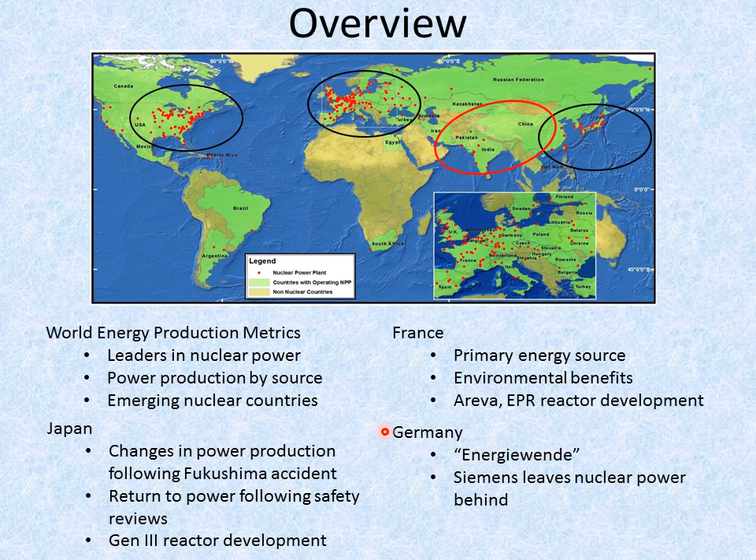We'll take a look at world energy production metrics and emerging nuclear countries. We'll move on to Japan and the status of their nuclear industry following the Fukushima accident. We'll look at France as a model country for nuclear power, and we'll move on to Germany's energy transition. We'll look at how Russia, China, and South Korea are expanding their nuclear capacities as well as those of other countries.

And we'll take a look at why India's nuclear fleet has largely been constructed by other countries, as well as the beginning of their own domestic production. Lastly, we'll look at the repositories being built in Finland and Sweden.

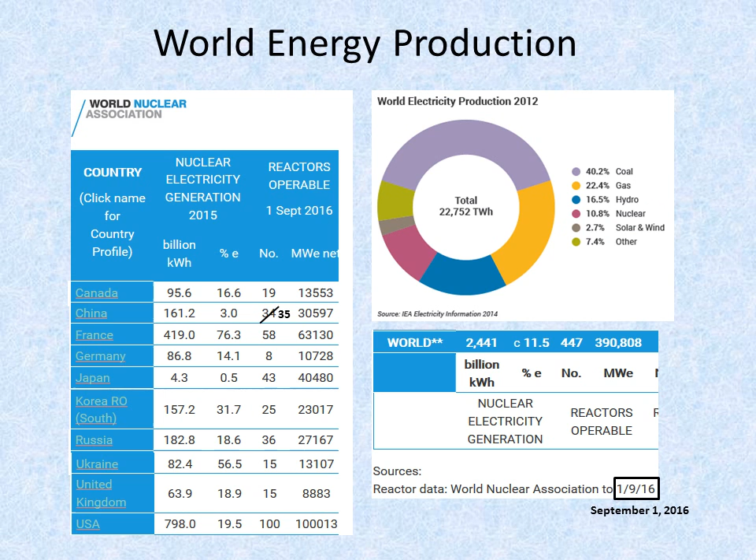We see here a comparison of the operating capacity of the world's nuclear leaders. We see the United States has the most reactors with 100, and France in second with 58. And 447 reactors operating worldwide generate roughly 11% of the global electricity supply.

We have some other graphical representations of the leading nuclear capacities worldwide. In addition to the operating reactors, there are 59 under construction, 168 planned, and 345 proposed.

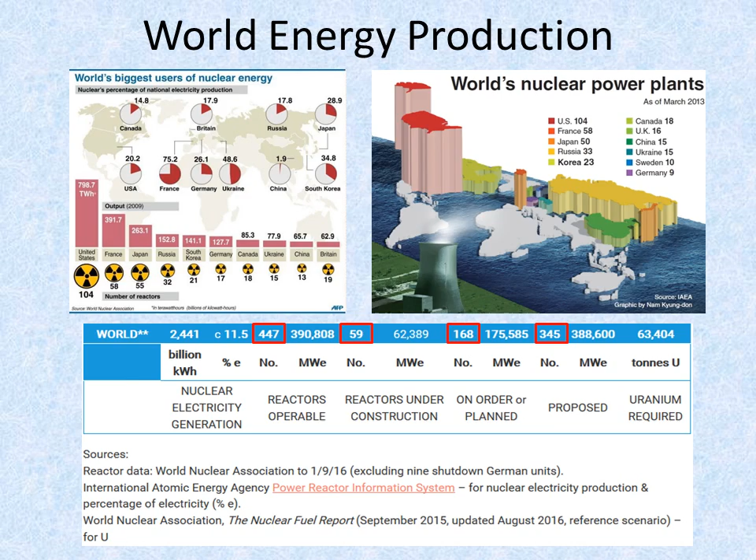While this presentation focuses primarily on the generating powerhouses of the world, it's important to note that there are several smaller countries looking to either develop or expand their own nuclear power programs. Despite this, the largest contributions to the global generating capacity will continue to come from countries who have already well established their nuclear sectors.

Japan is the first nation we'll take a closer look at. For each country, we'll see the number of reactors operable, under construction, planned, and proposed at the top of the page. As a result of the Fukushima accident, Japan's nuclear generating capability has largely been diminished, as the majority of their reactor fleet was forced to shut down after the tsunami.

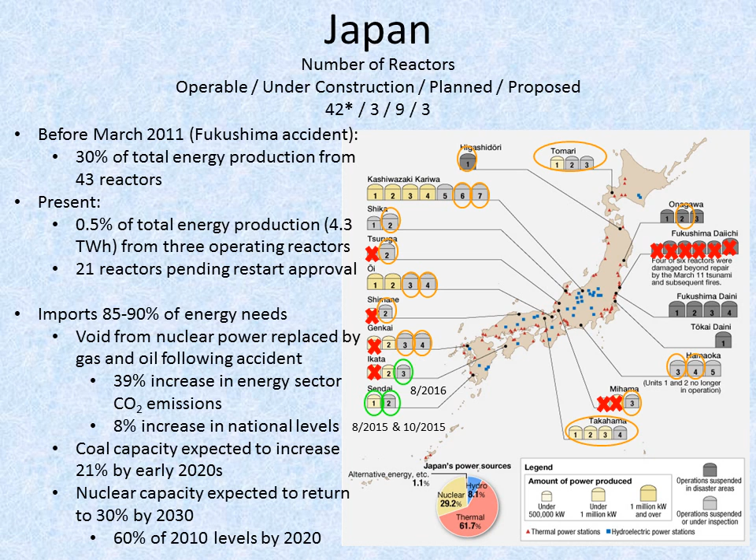Where Japan once generated one-third of its total energy production from nuclear power, today just 3 operable plants generate a fraction of that number. The rest of the fleet is awaiting restart approval for reasons ranging from but not limited to safety inspections pending and under review, court injunctions, and engineering upgrades.

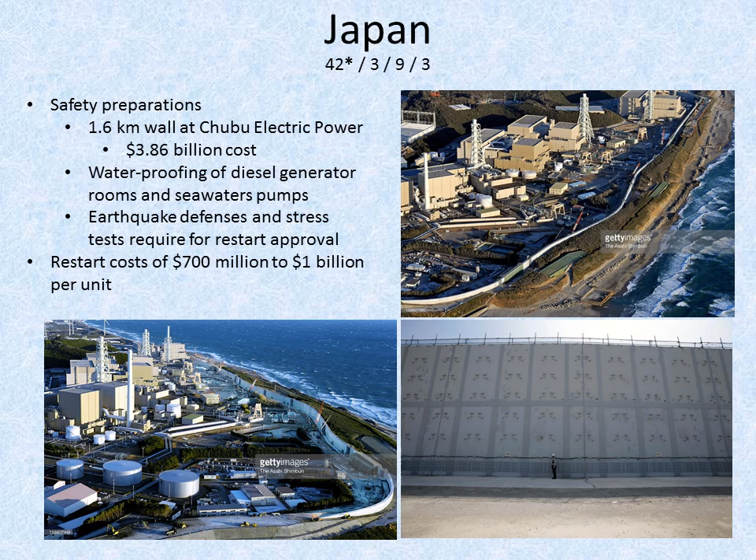We see some of the engineering upgrades taking place in the form of the tsunami wall, with a price tag of nearly $4 billion. Before returning to power, reactor sites must pass stress tests in which tsunamis, earthquakes, and loss of power scenarios are simulated using a reactor at full power with full used fuel ponds.

Prior to 2011, we see a push for self-sufficiency in the island nation of Japan, their work towards a closed fuel cycle, and the development of their fast breeder reactor technology. Despite the meltdowns at the Fukushima plant following the tsunami, Japan has continued development of their nuclear program.

Immediately following the accident, the controlling government party actually lost office after trying to make a move away from nuclear power. We see here construction of Japan's new Generation 3 and 3+ reactors, one of which has been proposed for the Comanche Peak site in Texas. Japan hopes to return to their pre-2011 nuclear capacity by the year 2030.

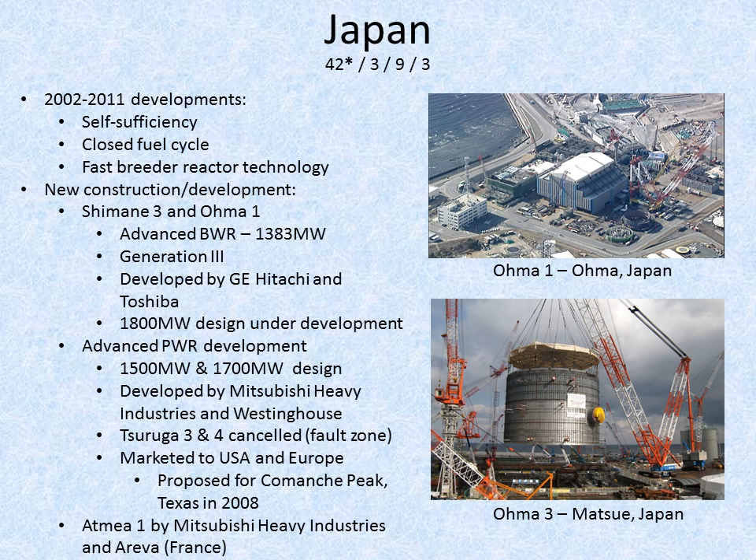France. France is the world's poster child for nuclear power. This nation contains half as many reactor plants as the United States in a nation roughly the size of Texas. From their 58 nuclear power plants, they generate roughly three-quarters of their national electricity supply, and this results in them having the cheapest electricity in the European Union.

France. France is the world's poster child for nuclear power.

This nation contains half as many reactor plants as the United States, in a nation roughly the size of Texas. From their 58 nuclear power plants, they generate roughly 3/4 of their national electricity supply, and this results in them having the cheapest electricity in the European Union.

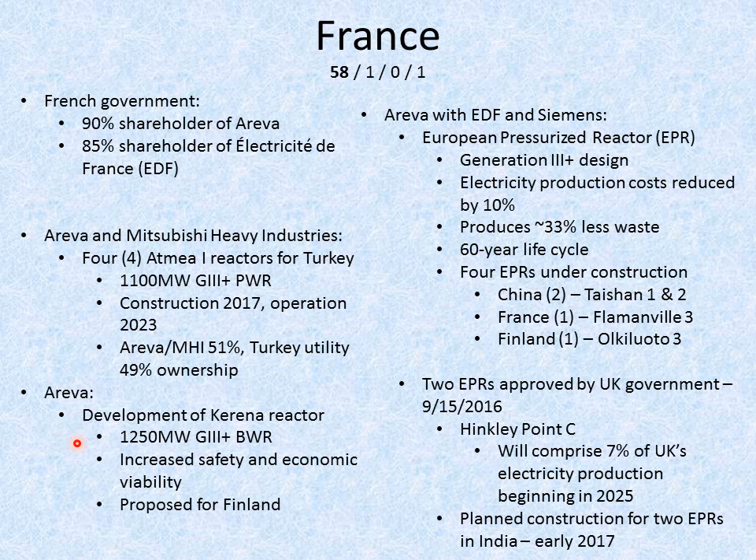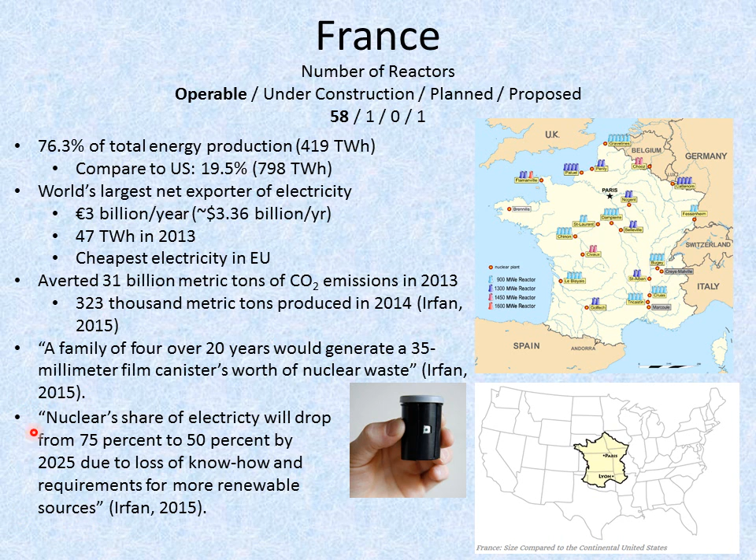Unfortunately, French energy officials are anticipating a reduction in nuclear's share of energy production in the coming years as the nation turns more to renewables.

Next, we'll take a look at France's neighbor to the east, Germany, where we see that they have 0 reactors planned, under construction, or proposed. In fact, of the nation's 17 operable reactors, only 8 are currently online, and the rest are scheduled to be shut down by the end of 2022.

Germany's decision to move away from nuclear power has come as a result of the Fukushima accident, as well as Siemens' decision to withdraw from the nuclear industry.

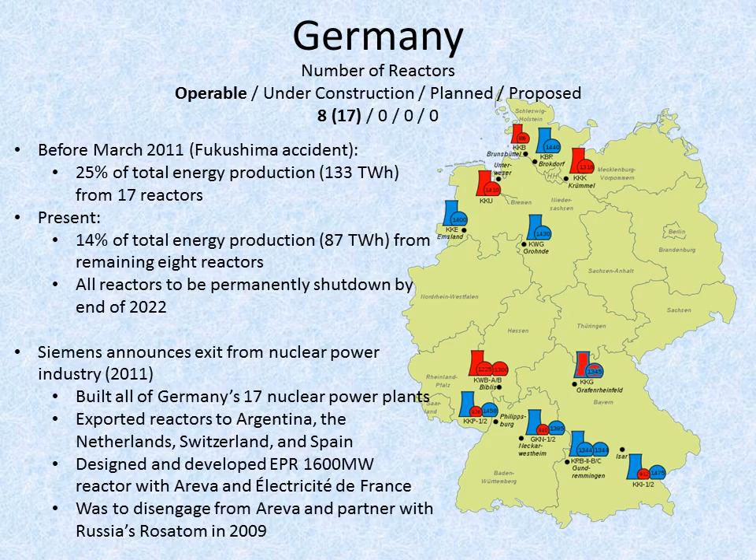Germany will be making its Energiewende, or energy policy transition, from nuclear power to renewable energy sources in the coming years. However, they still rely heavily on coal power production.

But this transition is coming with a heavy price tag and is already being felt by families in the form of a new sustainability surcharge tax.

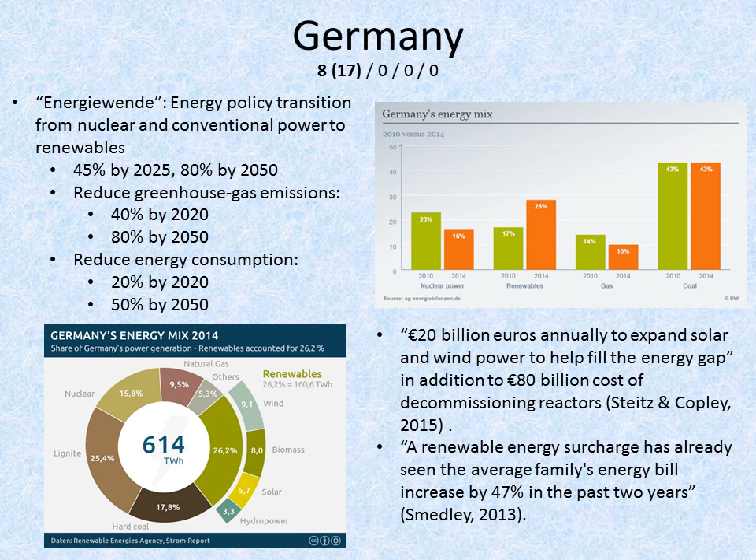Russia derives roughly 1/5 of their total energy production from nuclear power, and currently they rely heavily on gas.

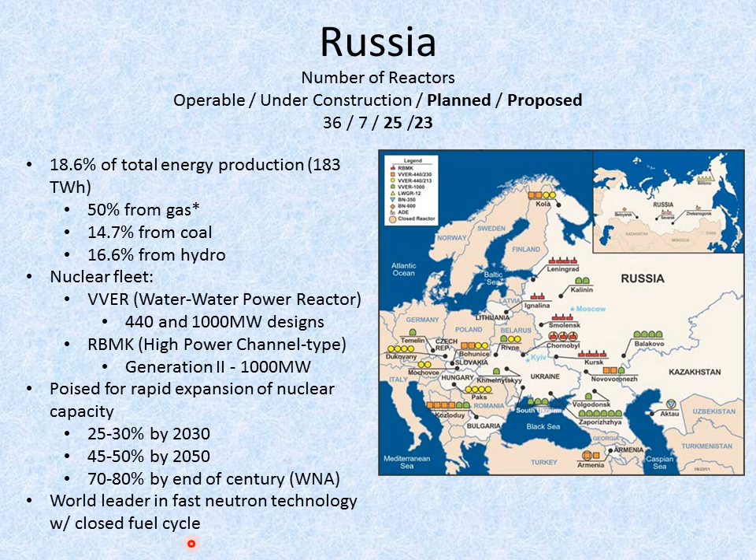We see a roadmap for the coming construction of new nuclear power plants that will replace the aging fleet, in a roughly 1-for-1 swap that will not dramatically increase the nuclear generating capacity.

Nuclear power company Rosatom espouses the socioeconomic benefits of investing in nuclear power, while national gas supplier Gazprom intends to move away from domestic electricity production in favor of exporting gas supplies to Western Europe at 5 times the profit.

Russia has no intention of developing a solar or wind power base. Their sights are aimed on nuclear power.

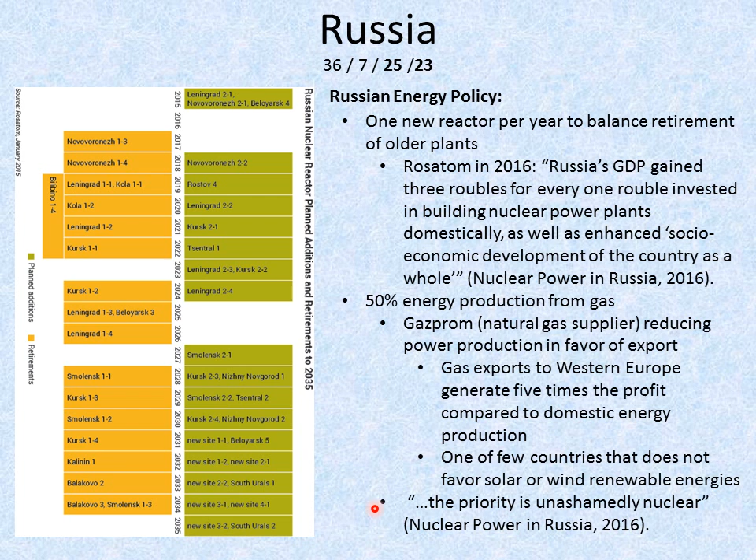What Russia is trying to accomplish right now is the development of the next generation of reactors that will spur their nuclear expansion in coming years.

Russia is working towards a closed fuel cycle that minimizes radioactive waste by reprocessing used fuel. Mixed oxide fuel technology allows for the use of multiple fuel materials in the same reactor core.

Russia has placed an emphasis on their sodium-cooled fast reactor technology development, while also continuing to take a look at heavy metal coolant technology. Additionally, Russia has laid the hull for their first 200-megawatt floating nuclear power plant.

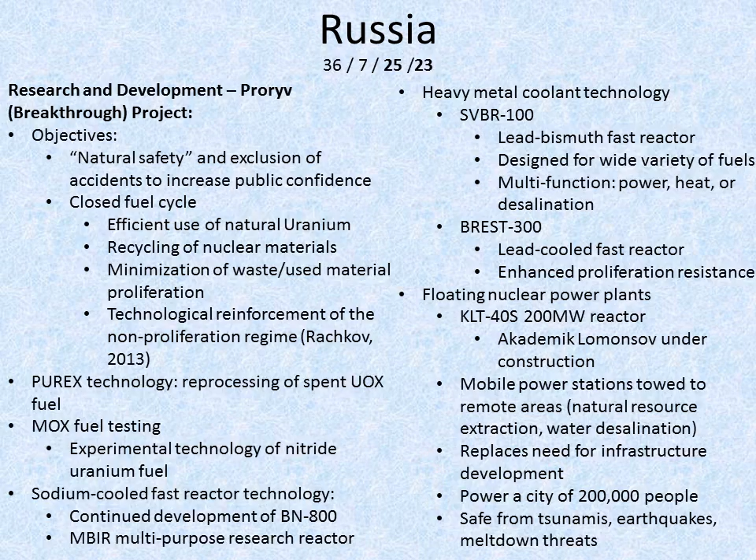And what these additional proposals demonstrate is that smaller countries are looking to the nuclear powerhouses of the world to help them develop their own domestic nuclear power programs.

Next, we'll take a look at energy production giant China, which surpassed the United States in 2011 to become the world leader in total energy production capacity.

Now we can see that China has huge plans for developing their nuclear sector, planning to double and then triple their nuclear capacity. For a country who currently only generates roughly 1% of their power from nuclear sources, this is a rise to only 7%.

And that might seem small, but for a country who currently generates 1/5 of the total world energy production alone, 73% of which comes from fossil fuels, that means great things for reducing CO2 emissions.

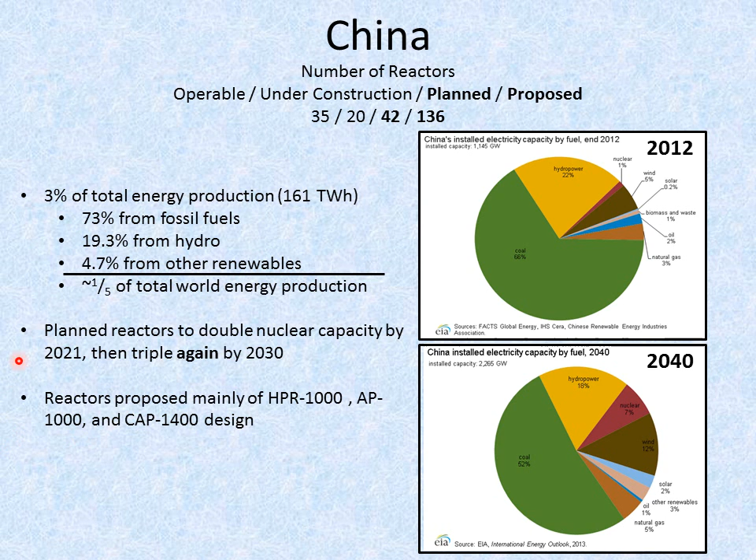And we'll take a look at the reactor technology for the coming Chinese nuclear fleet. Now, in the last few decades, China has acquired much of its reactor technology from the United States, Canada, and France.

Now, they've made their own modifications and upgrades, which have largely made this reactor technology Chinese intellectual property. From this, they've developed their own Generation 3 reactor, the Hualong 1, which they will be building one for the United Kingdom in the coming years. China is also helping to construct and finance two EPR designs for the United Kingdom, of which they will also maintain a share of ownership in.

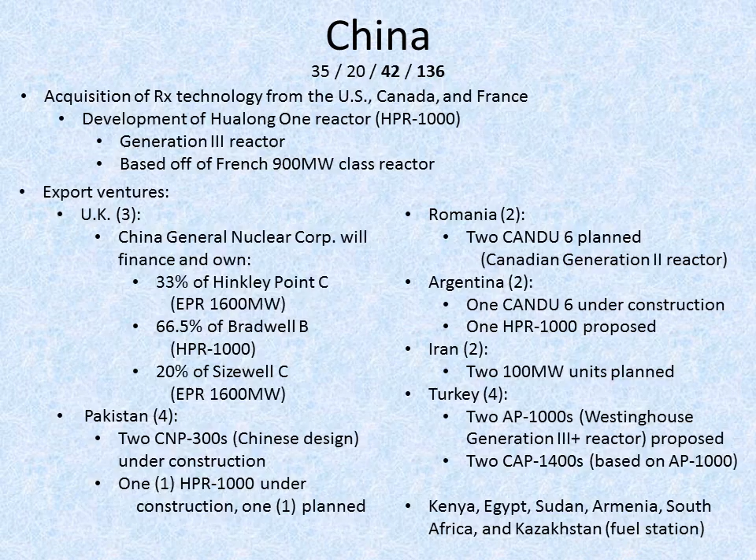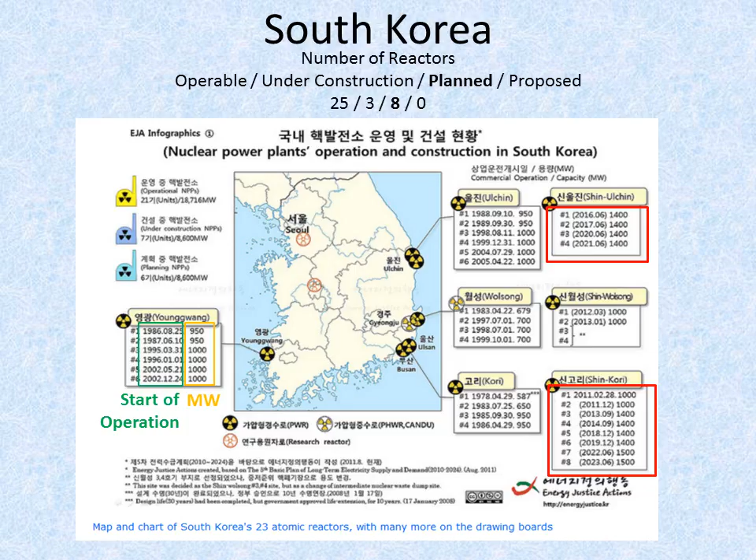Now as we move over here, we see the new 1400 megawatt reactors planned for 2016 and beyond at two different sites, as well as a 1500 megawatt design. South Korea currently generates one third of its total energy production from nuclear power, with intentions of expanding this number to 70% by 2029.

South Korea's 1400 megawatt reactor is a Generation 3 advanced pressurized water reactor, and the first one was brought online earlier this year. There are 3 more under construction, with 4 units planned, and its Generation 3 Plus successor is in its final stages of development.

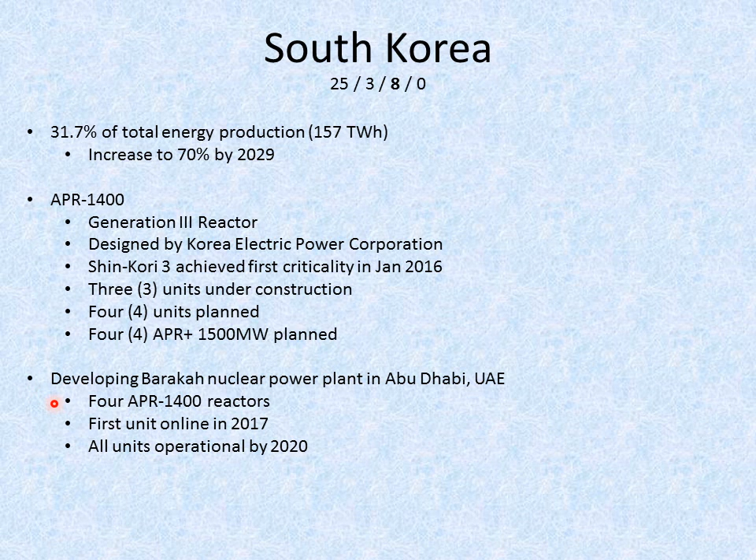The new Generation 3 Plus design will yield a reactor with safety levels an order of magnitude higher than its predecessor, mostly due to increased redundancy of emergency systems.

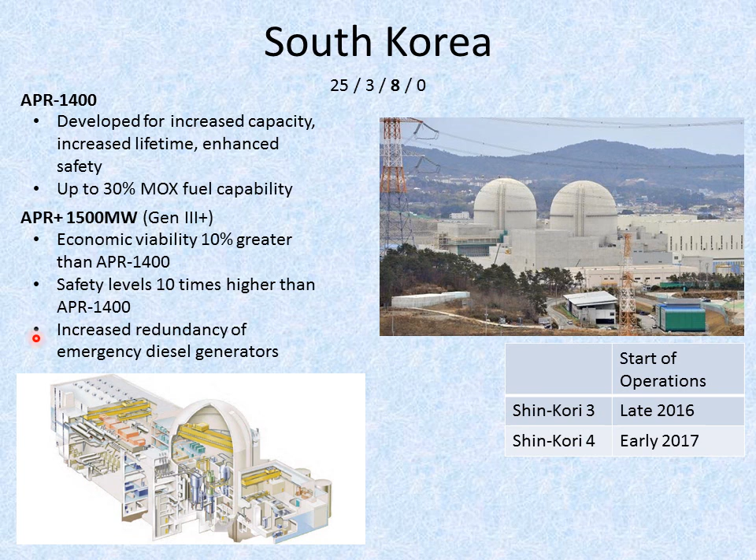Lastly, we take a look at India's nuclear power industry, which only generates a mere 3.5% of the country's total energy supply. Currently, they rely largely on coal supplies. However, their reserves are limited. We see that they have ambitious goals for the future of their nuclear power program.

Like Russia and Japan, India has placed an emphasis on their fast reactor technology, but uniquely to India, they have also developed their expertise in the thorium fuel cycle.

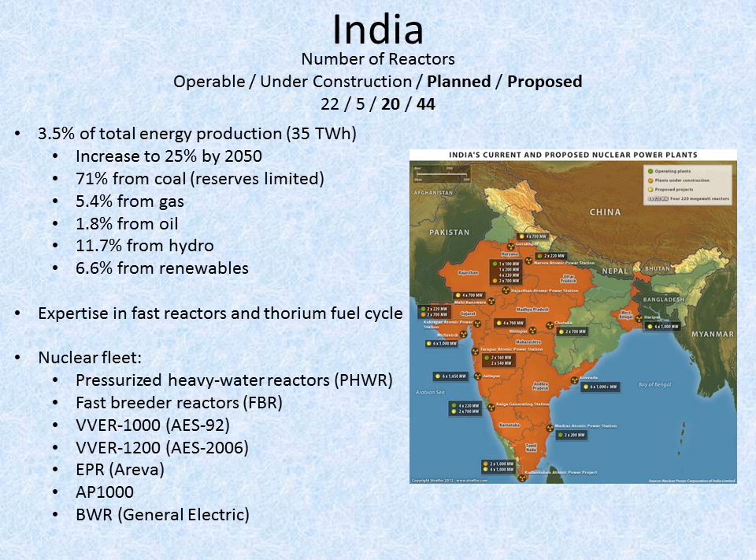The diversity in India's nuclear fleet is a result of them being a non-signatory of the Nuclear Non-Proliferation Treaty, which excluded them from international trade in nuclear materials and fuels for the past 3 decades.

Because of the limited supply of domestic fuel supplies, these plants must run at a lower capacity. Meanwhile, the country is dealing with a coal shortage, as previously mentioned.

Over the last few years, India has gained support from the United States, Canada, and France to join the Nuclear Suppliers Group, which requires a unanimous decision from all 48 members for admittance.

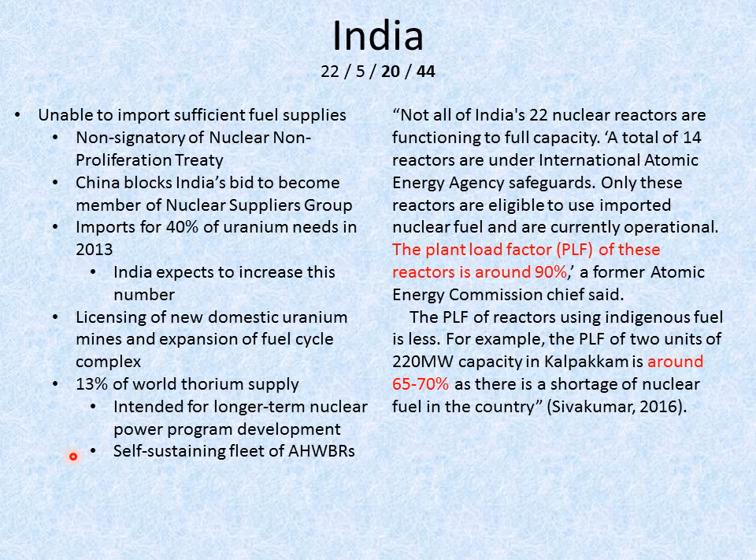As a result, India will continue to import reactor plant technology, as well as simultaneously opening up several new domestic uranium mines. India also holds 13% of the world supply of thorium, which it intends to use down the road for a self-sustaining fleet of advanced heavy water breeder reactors.

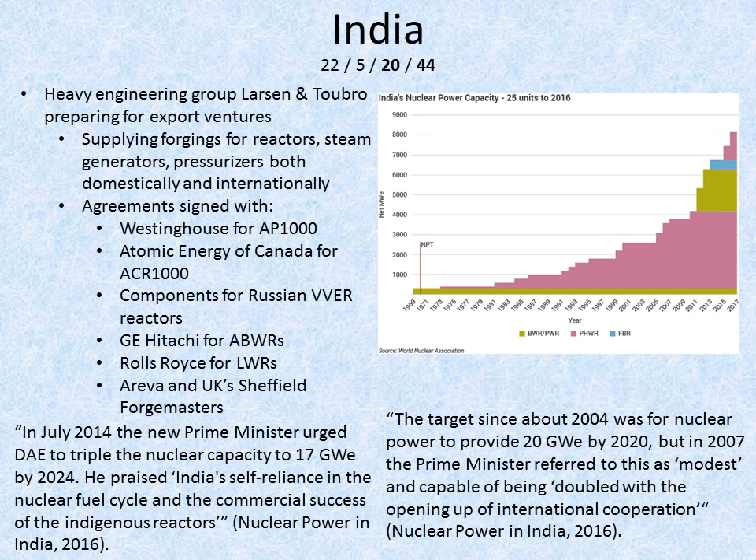These facilities are expected to start operation by 2030, and once sealed, are expected to safely house the radioactive waste for several 100,000 years.

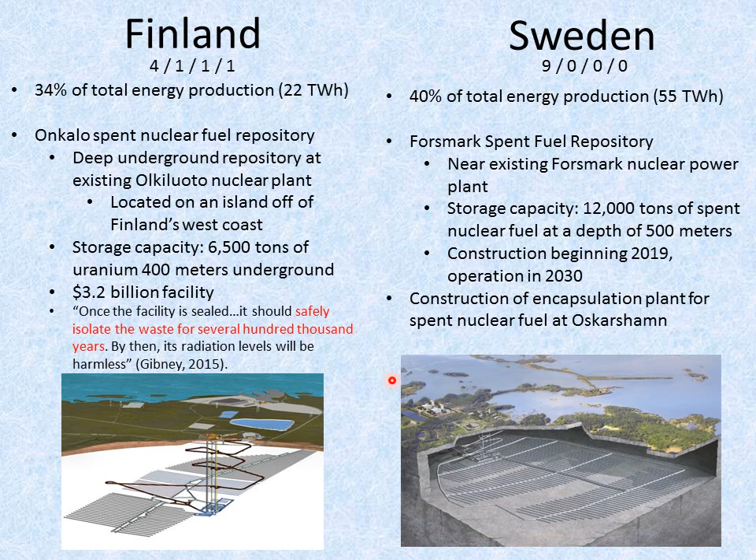Now to recap, we took a closer look at the nuclear industry of Japan, France, Germany, Russia, China, South Korea, and India. And we took a look at the spent fuel repositories being proposed for Finland and Sweden. We will talk about common themes in our conclusion section.

So I believe what we've seen as far as nuclear renaissance is concerned outside of the United States is that nuclear power may be waning in Western Europe. We see France isn't building as many power plants as they used to. You see more of a move towards renewable energies. Germany is getting out of the nuclear power game. You see Spain turning more towards renewables, and other countries just not eager to start new construction at this time.

However, in Eastern Europe, Russia is greatly expanding their research and technology base. They're building nuclear plants for many other countries in Eastern Europe, in Asia, and even Africa as well.